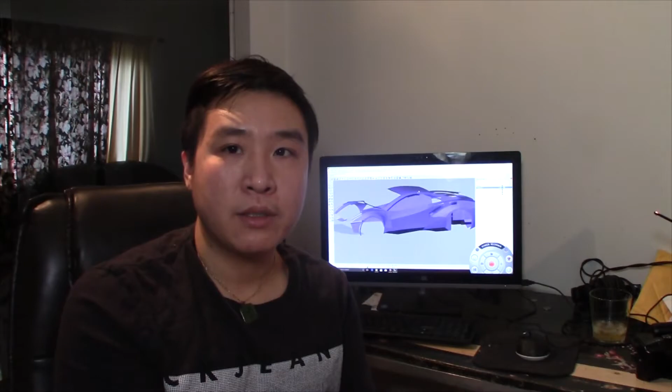Right now, I have a very rough idea of what it's going to look like. It's in purple right now—it's not supposed to be, but this is just a really rough draft of what I want it to look like. So that's what this video is about. I'm going to include you guys in the 3D modeling process of the new G35 Rebody design. So let's go ahead and get started.

That's good ginger soda.

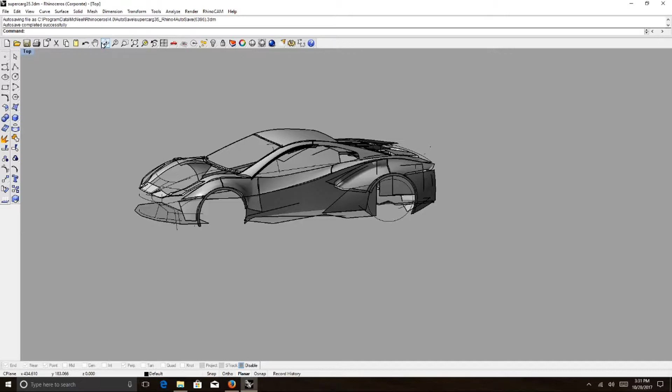Alright fellas, we're in Rhino 3D, and what you see here is a very rough design of the G35 Project Rebody. Let me do a little bit more explanation of what's going on.

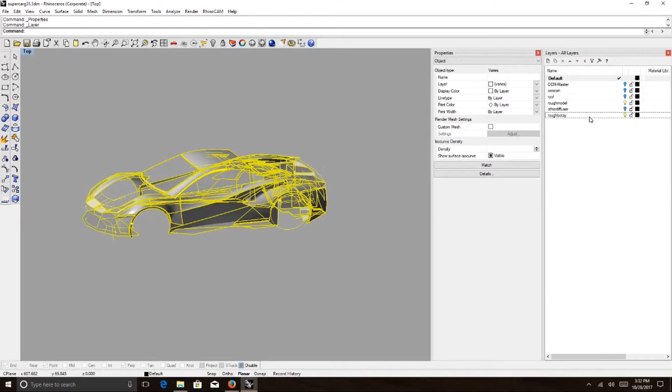Let me group this, and I will hide it. Actually, I will put it on its own layer—roughbotay. Alright, we'll get rid of that, hide it for now just to give you guys a better look at what's going on.

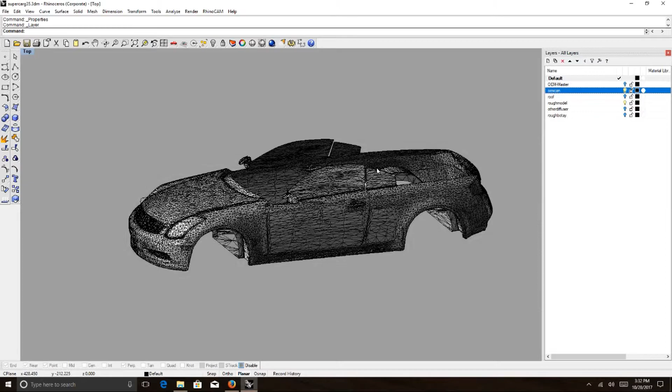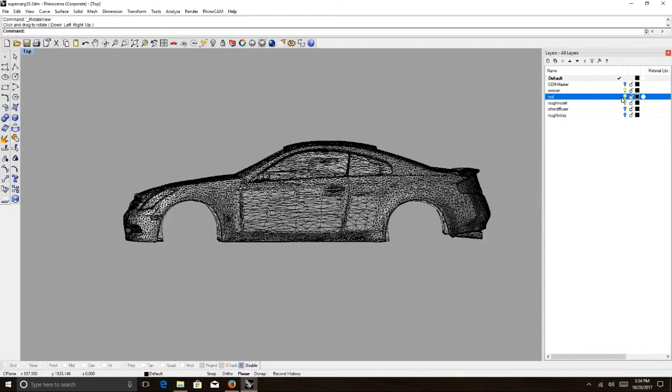So we have a scan of the G35 car. Because we're doing a more supercar look, the roof isn't going to work for us—it's just a little bit too tall, too high. So we're cutting it off, but we're going to keep the doors because that's important. The doors are still going to be there to make the kit a lot easier to build. So let's go ahead and remove the roof.

Because we're using the original doors, we will also be using the original glass. But you might be asking how the profile of the glass will be altered according to the new roof you're designing. Well, I have a few fabrication tricks we're going to do.

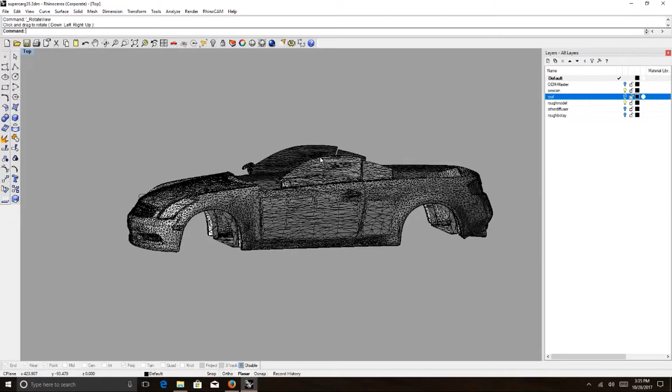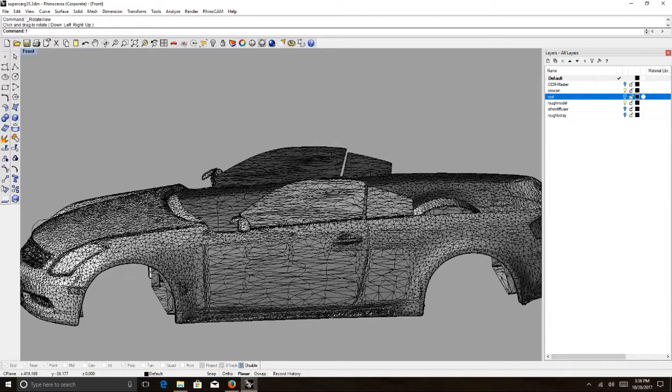With the new profile of the window, this is our current profile. But because we're making our roof a little shorter, some of this glass at the top has to be cut off. There's really only one thing we should do: take a belt sander and grind it all the way down to the new profile line we want, right about here. So imagine everything above this line on the glass, take a belt sander and shave it all the way down.

Now I'm going to show you the body I've designed so far. It's rough, real rough.

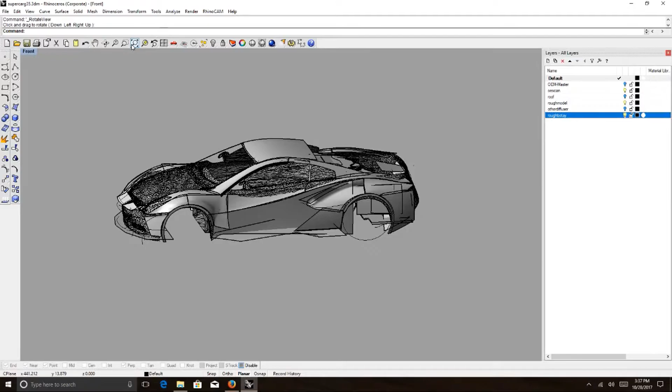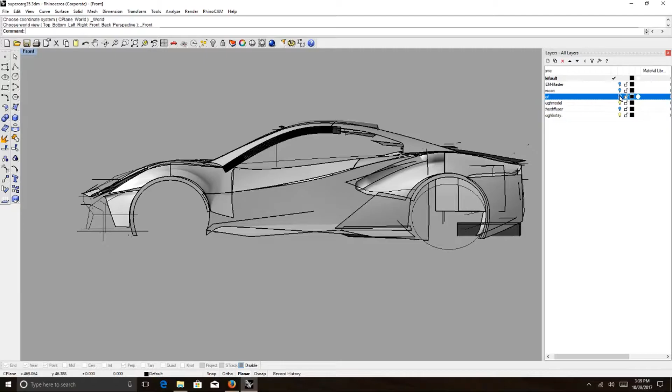The one thing I did with this is, if you can see the new roof, it's moved forward about 6 inches to give it more of a supercar look. Comparing the new roof with the old roof, you can see the difference between the two. That's why we have to chop off the roof on the G35 to put the new roof on there. It's just going to make it look like a different car.

And for the taillights, I don't know which ones I want to use yet. I think I want to use some Audi taillights. If you guys have any suggestions, leave some in the comments.

Okay, so I think that's a pretty good overview of what I have going on right now with the design and what I plan for the car.

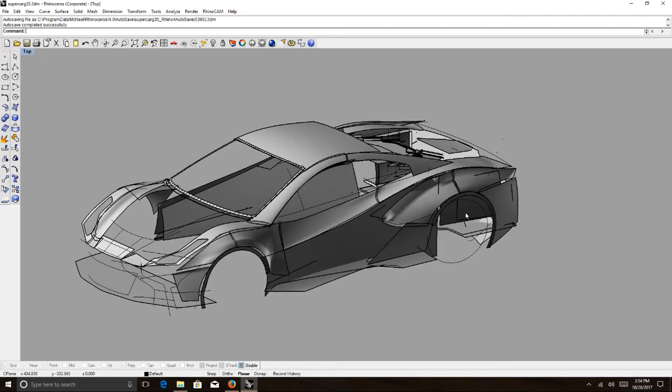I think we should go ahead and do a little bit of 3D modeling work. Let's start with the front end a little bit. Alright, I think I want this line to come out a little bit more this way.

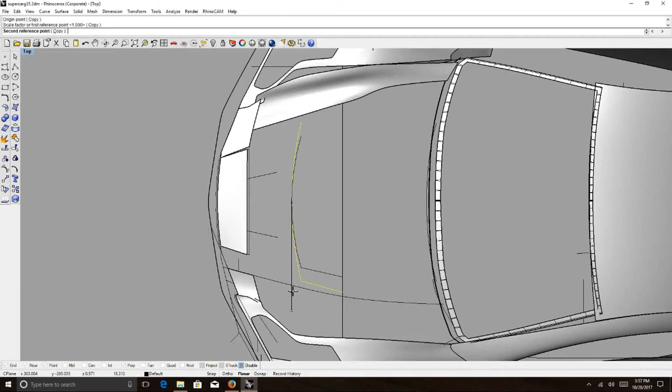This profile here is actually an air ram that I want the air to go through the radiator in the front and then come out the top here. That's just the profile of it, but I want that moved back just a little bit and a little bit inward. We're doing very rough design changes here. Somewhere around this area, I want it to concave in a little bit to give it a nice aerodynamic feature that will regress at the top.

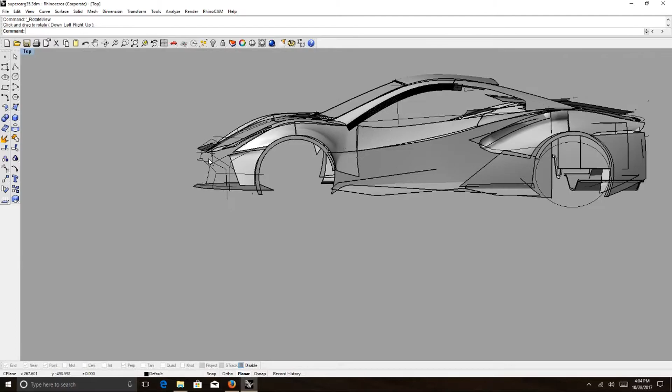If you guys have any suggestions what the front should look like, especially this lower front bumper area—to me that's the hardest part to figure out—go ahead, post it in the comments, post a link to a picture, send me an email, call my phone, text message me, send me a courier pigeon.

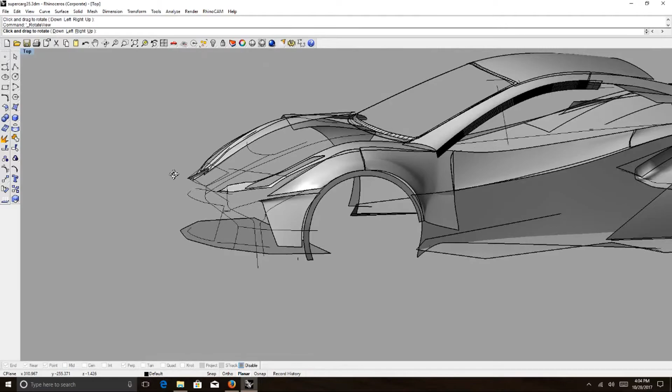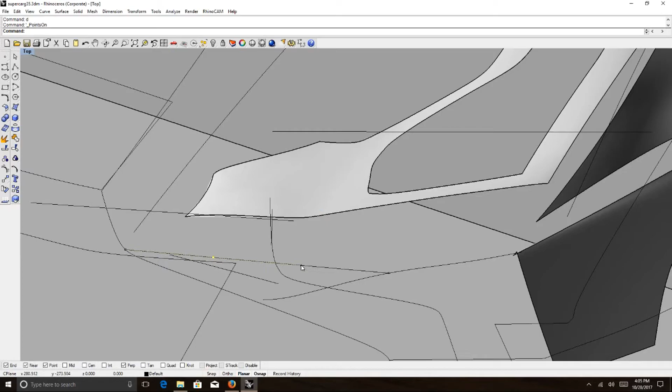Oh yeah, a fun fact about courier pigeons: the only way they travel is going home. So you train a pigeon at its home, you take it somewhere, let it free, and it'll fly back home. That's why they call it a homing pigeon. I may be wrong, I heard that somewhere. Don't take my word for it.

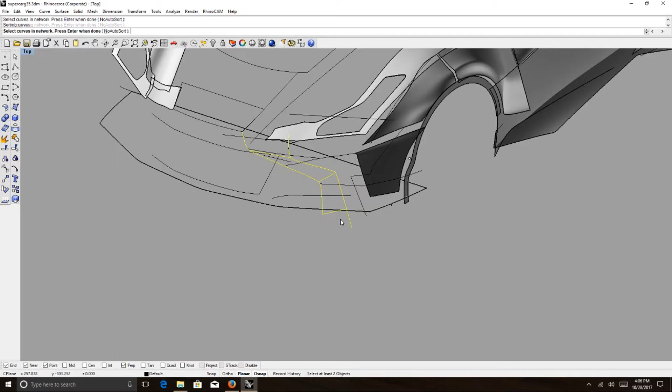Alright, let's get a little funky here. Sometimes when you draw lines and start moving things around, you start seeing certain shapes come together. Oh, now we're getting funky. Let's not get too funky. You see that little hole? You see where the air is going in?

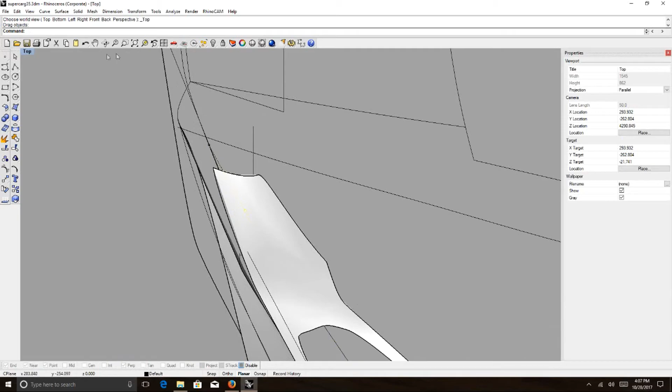Remember that fact about a homing pigeon? Those were good times. Move stuff around, manipulate things, rotate them, bend them. You know, use the spices of life.

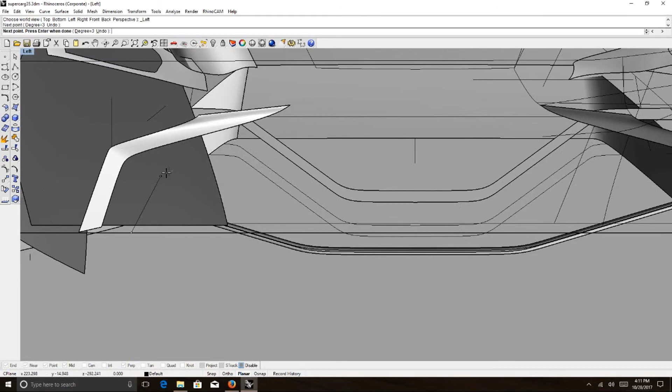Sunday morning, rain is calling. Share some cover, share some skin.

Oh yeah, doesn't that look good? Tell me that don't look good. Come on, man.